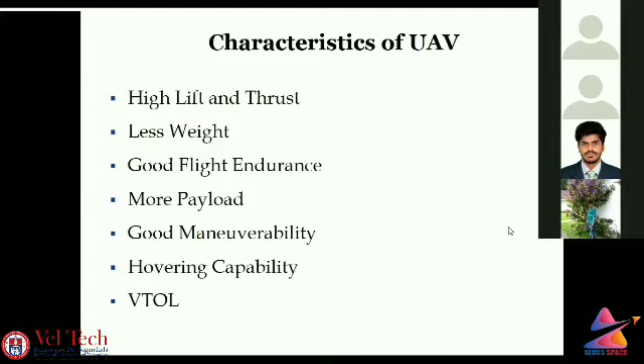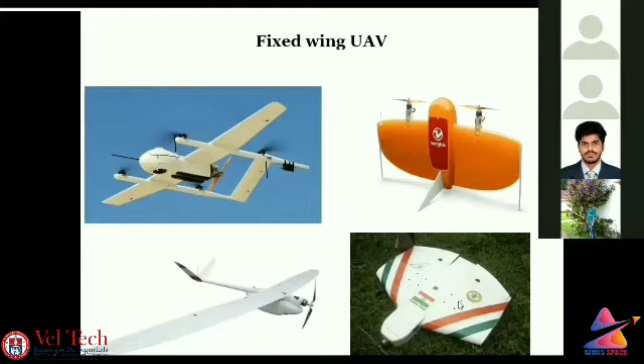So just a glimpse of a few vertical takeoff vehicles. This is one vertical takeoff vehicle, and this is also a vertical takeoff vehicle. And some of the other vehicles here were developed by our DRDO lab.

If you take any fixed wing vehicle, you will have 3 control surfaces. As I mentioned about roll, pitch, yaw motion, the roll is controlled by this aileron control surface, pitch is controlled by the elevator, and yaw is controlled by this rudder.

So whenever you are sitting on an aeroplane, the vehicle is rolling and pitching up and down, and yawing is left and right motion. Rolling is rotating the plane about this axis, pitching is up and down motion about this axis, and yawing is your left and right motion.

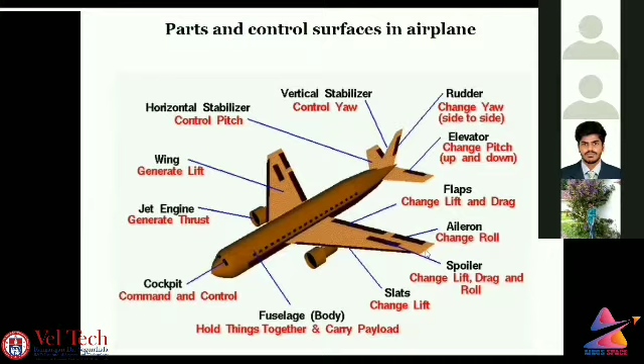So whenever you experience a flight, you have these 3 maneuverability controls to move and navigate in a space. That is what these control surfaces are useful for. Other elements like cockpits, engine, and additional stabilizers help ensure you are able to achieve a stable flight. So this is the basic control surfaces for a fixed wing vehicle.

If you think of lift and thrust, what is lift? Lift is nothing but a force generated against the weight, including the payload. So whenever you experience lift, it will be above this particular weight, including the payload.

Whenever these two are balanced, when the lift is balanced with respect to weight, and also the thrust, which is against the wind condition, the drag, when thrust and drag, and lift and weight, are equally balanced, at this condition you will be able to achieve a stable flight.

So the point here is you balance the vehicle, your unmanned vehicle, with respect to its own weight, including payload, with respect to lift, and you balance the air resistance, which is drag, external wind resistance, that is nullified with the help of thrust generated by the UAV. If you balance these two forces, lift and thrust, then you are able to achieve a stable flight in any kind of UAV.

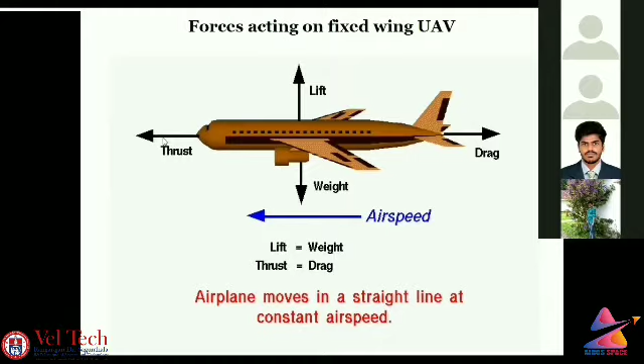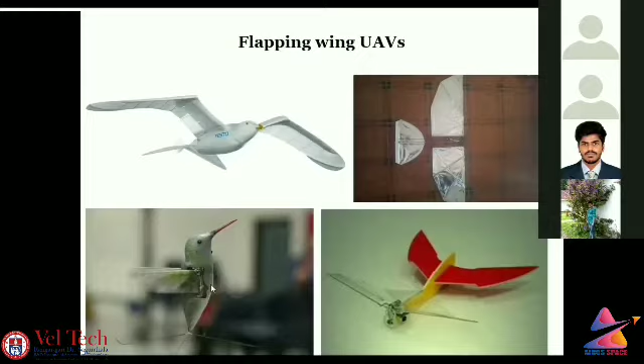These are all different flapping wing vehicles you can think of if you want to design any kind of bird-like structure. So what are the typical parts involved in the ornithopter?

Basically you will have a transmission element. You are having a BLDC motor, brushless DC motor, that will be rotating about 32,000 or 40,000 RPM. You want to achieve about 1,200 RPM, so 1,200 RPM divided by 60 will be 20 hertz. That 20 hertz flapping frequency requires you to reduce the speed from 32,000 RPM to 1,200 RPM.

So there will be a gear reduction unit in this, and also your rotary motion has to be converted into an up and down flapping motion. So the gears and the linkages are called transmission elements.

And we will be having a lithium polymer battery, an RC remote chip, also the controller unit, a small chip, and a flapping wing material like Parylene or Mylar or any other polymer-based material having high stiffness. So why high stiffness? It should withstand the high cyclic up and down motion coming from this particular mechanism. That is, the rotary motion is converted into flapping motion.

About 20 hertz means 20 cycles per second. So per second, it flaps up and down 20 times. If you think about a hummingbird, its flapping frequency is about 80 to 100 hertz. So it is flapping about 80 times up and down per second. So you should think of how much it should resist. Your wing material should resist the load coming onto it. So a flapping wing with high stiffness material is very much needed, otherwise it will tear off.

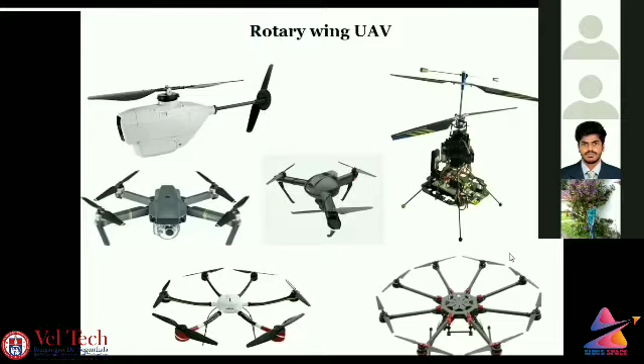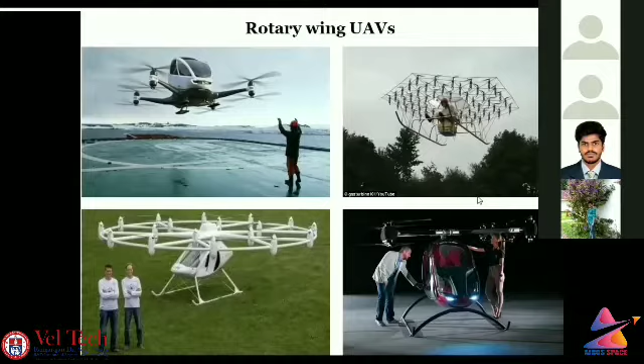So if you think of typical quad rotor parts, you will be having a brushless DC motor and propeller combination, and an ESC, electronic speed controller. These are coming together. Even the motor and electronic controller are integrated nowadays, so you don't have to waste the space. So this is the basic unit: electronic speed controller, motors and propellers. This is one set.

And you will be having the main brain of the system, called the flight controller, which I will explain in detail. And also you will have transmitters; the RC signal will be received by an antenna mounted on the UAV and the control receiver. And you will be having a battery; lithium polymer batteries are used for this kind of UAV because they are highly rechargeable and have good life. That is why we use lithium polymer batteries instead of other batteries. So these are the typical parts.

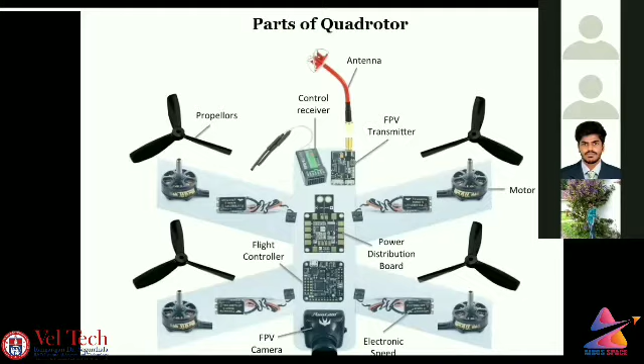If I go with specific parts, for example, if you want to select a propeller, normally propellers are both clockwise as well as counterclockwise. If you see this tip, you can see this box. Whenever air is hitting on it, it will rotate in a clockwise sense. You see a protrusion in the propeller, and the wind is hitting onto the propeller, and you can claim that rotation is clockwise. And here it is hitting in this direction, and this particular propeller is counterclockwise.

So why clockwise and counterclockwise propellers? With adjacent rotors rotating clockwise and counterclockwise, the two moments coming from each other will be balanced. So if I have a quad rotor, the adjacent two propellers should be opposite to each other, so that the moments will be balanced and we will achieve stability. That is why we go for clockwise and counterclockwise propellers. Generally, we define the propeller in terms of its diameter or length and its pitch. So 10-inch diameter and 4.5-inch pitch, for example.

So what is pitch? It is nothing but, when the propeller is rotating for one revolution, how much the UAV is advancing. So that is what the pitch is defined as. So if you are having more pitch, you will be moving very fast. So for example, if I want to select a propeller smaller in diameter with high pitch, it will be suited for fast and quick maneuvering operations.

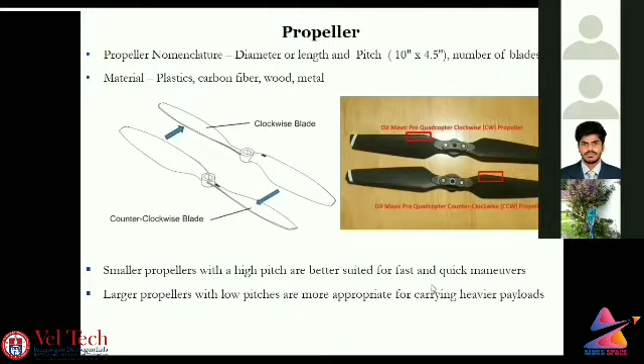So normally there are high kV ratings and low kV ratings. For example, if you want less load carrying capacity and your torque requirement is less, then you should go for a high kV rating. If your torque requirement is high, then you should go for a low kV rating. So high load means high torque, so you will go for a low kV rating. So depending upon the demand and your payload, you have to choose your kV rating.

For example, 180 kV will be useful for high torque requirement, high load requirement. 900 kV or 1000 kV when you want to move very fast but carry less load. So those aspects are important in selecting your motor. Nowadays T-Motors are predominantly used because of their high reliability.

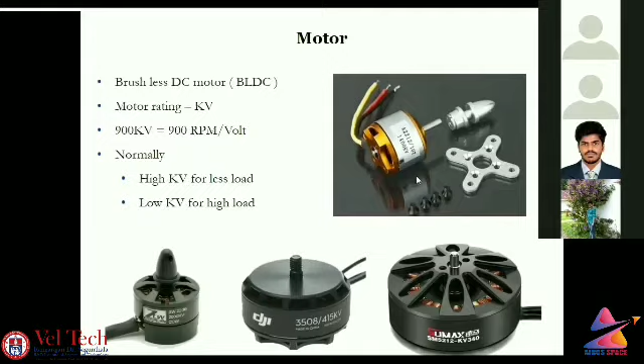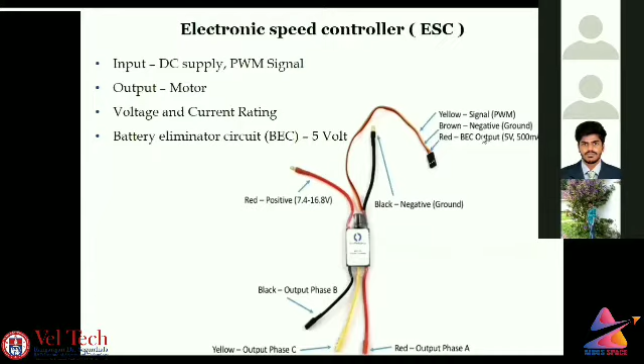Okay, and we have a transmitter. Usually the ISM bands, Industrial Scientific Medical bands, are using these 3-4 frequencies: 433 megahertz, 900 megahertz, 2.4 gigahertz, and 5.8 gigahertz for research purposes. So you have to choose any one of the frequencies for your RC, radio control. Normally 2.4 gigahertz is very widely used by all the people for radio transmission models.

And 433 will also be useful for telemetry signals. Whatever the sensors or control units, all that information from the UAV will be sent to the ground station with the help of telemetry, that is 433 megahertz frequency. You can use 900 megahertz for video and 5.8 gigahertz for some other purpose, or even 5.8 gigahertz for video and 900 megahertz for some other purpose. So it depends upon your application.

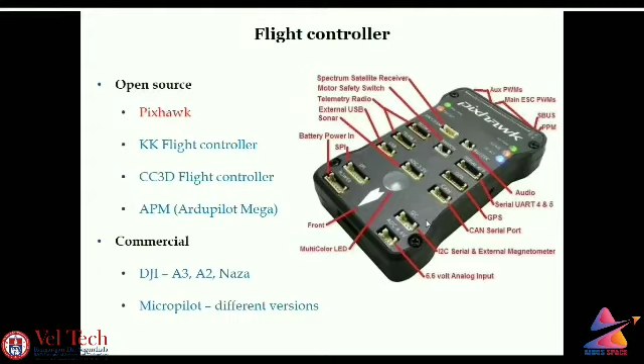And this controller will have 4 sensors. For example, the accelerometer will define your acceleration; then you integrate, and you will get the velocity of the vehicle. Gyroscope, which will give the angular velocity; then you can get the roll and pitch angles when you integrate this angular velocity. And magnetometer, which will give the direction of your vehicle. And barometer will be useful to understand the altitude with respect to its barometric pressure measurements. Your rho g h will be useful in calculating the height, altitude.

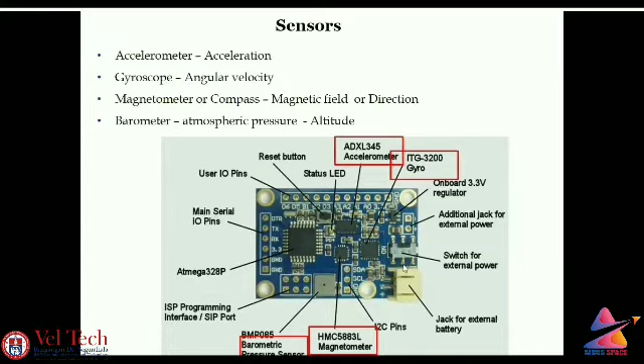So as you can see, all are micro-electromechanical based sensors. MEMS based sensors are nowadays very widely coming up. So you can play around with these kinds of sensors, get the feedback, and control your system. If you take any typical quadcopter, the circuit goes in this way.

You will be giving a 2.4 gigahertz radio control signal that will be received at the UAV by the control receiver, and that control receiver will send the commands. Whatever the commands from the 2.4 gigahertz frequency will be given to the corresponding units in the controller. The controller will send the signal to the ESC. That ESC will activate the motor.

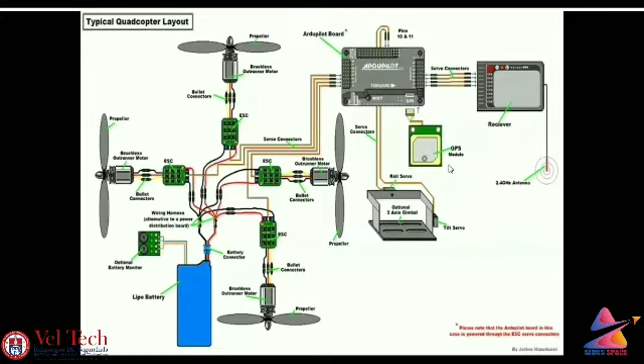So this is the typical flow of your UAV quadcopters, and you will have a battery to power all the electronic elements. And if you want to have some gimbals, you will have cameras to rotate. That is for your camera aspects. So you can have the gimbal system, and these are all the typical parts and how it is connected in terms of achieving the quadcopter UAV flying.

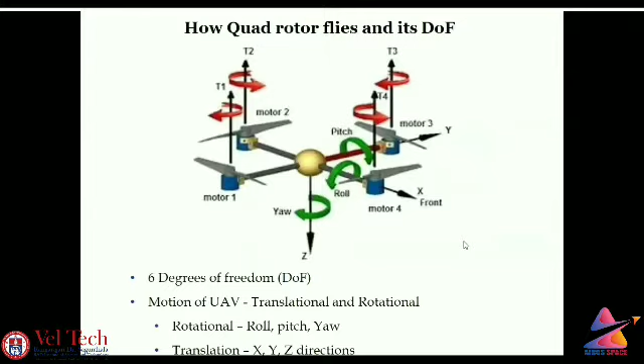So how does it fly? For example, normally it will have 4 rotors. So these are the 4 different conditions. For example, if I want to move the UAV, the quadcopter, I'll increase the speed uniformly for all rotors. So with respect to the thrust generated by the propeller, each propeller at the same speed will generate an equal amount of thrust. Then it will move up, against the weight including the payload. So we will be achieving the throttle condition.

And hovering: when all the motors are rotating at constant speed, we are able to achieve hovering. Pitch: the rear motors and front motors are controlled. So if you want to move forward, we will rotate this one at high speed and this one at low speed, and backward is the inverse. And if you want to roll with respect to this axis, we'll rotate this faster and this slower. And for yaw motion, the diagonal propellers will be rotated fast, and the other diagonal propellers will be rotated slow.

So this is the basic input and basic motions, how roll, pitch, yaw motion and hovering are achieved when you activate these four motors, varying the speed of the propellers and motors. So normally a PID controller, proportional, integral and derivative controller, is used in the Pixhawk or other basic controllers. So proportional will give how much you are able to move towards the destination. That is with respect to this gain, and the error is calculated from the feedback from the sensors.

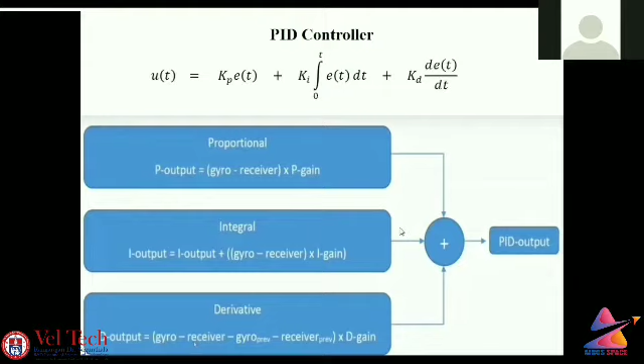So we have a ground control station to predefine the trajectory for flying in autonomous mode. What is autonomous mode? We don't have anyone to control your UAV. We just define the trajectory with respect to waypoints, what altitude and what speed, whether you want hovering at any particular point, and what latitude or longitude it is moving to. All that information will be stored and predefined. So you will just be flying in autonomous mode. So the ground control station is useful for that purpose.

Whenever you want to design any UAV, you should follow a certain procedure. For example, first you should calculate the weight. What is the weight of the system, including the payload? So based on that weight, you have a definition called thrust to weight ratio. Your thrust should be at least 2 times the weight, that is thrust to weight ratio 2. And what kind of endurance you want to go for. So this is the input you are looking for.

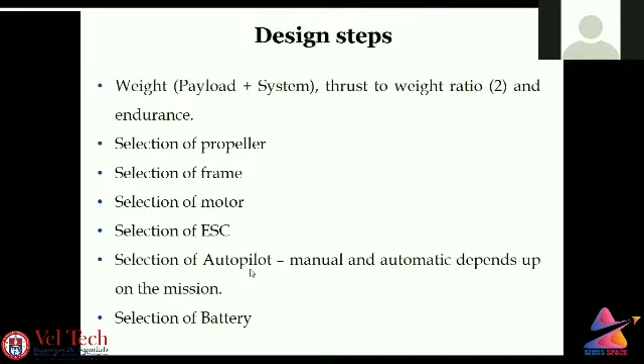According to this thrust, you will select the propeller, motor and ESC combination, and the frame, because depending on what payload you want to mount, you will design your own frame. And also your autopilot system, manual or automatic, depends upon the mission, manual or autonomous mode with predefined waypoints. And finally, with respect to your endurance, you select a battery, as I mentioned, the lithium polymer battery. So these are the different steps when you are designing a UAV.

We have done some work designing UAVs. First and foremost, we place the components to balance the CG. We go for initial CAD modeling, so that you have an idea where and how to place the components so that your center of gravity is balanced. That is the first thing you should take care of, because if your CG is out, everything is gone. For example, these red ones are the 4 batteries we have positioned, and in other places we have positioned other components, so you have a balanced CG.

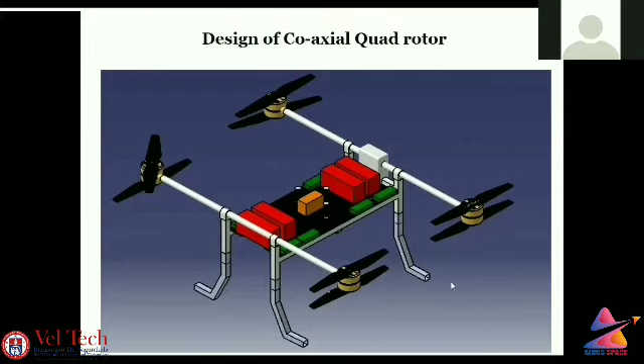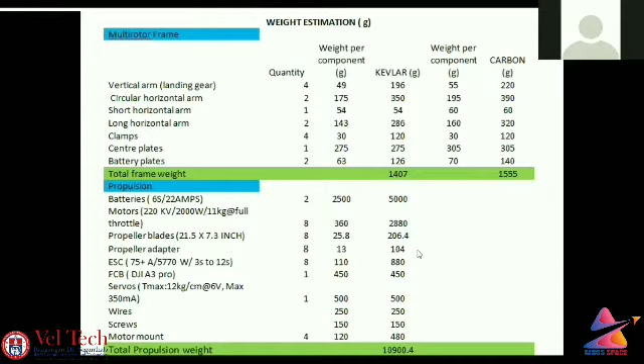And this is the simple autonomous flight we had at our Vel Tech. So this is our research park. I mean, this is our ground. This is our research park where I am sitting. So this is the trajectory which we planned. So this is the input and output, whether it is matched. So it was estimated and set point. Both are almost in a similar track.

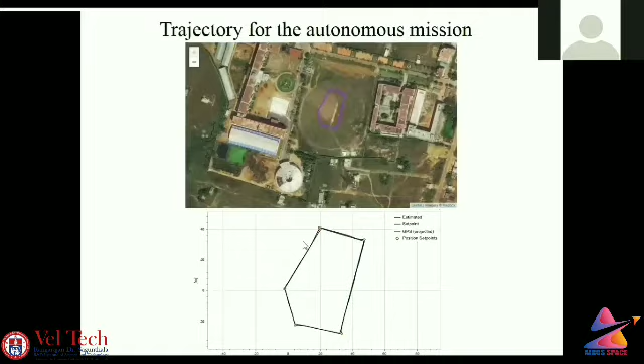So this is how the fundamentals of UAVs show the outline, what kind of components and how to select those components with respect to multi-rotor. Generally speaking, we should use UAVs where humans have difficulties, where we are unable to climb and do some of the works like bridges, heritage structures, and monuments, and some of the places where human risk is involved. So those aspects we were targeting using our applications.

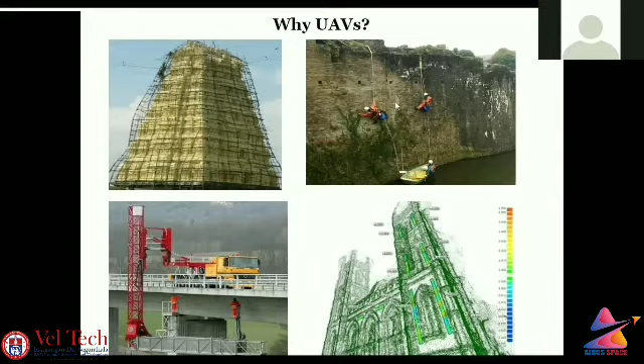So we have been working for the past 10 years, and these are some of the applications like power line inspection, telecom tower inspection, environmental monitoring, mines, pesticide spraying, water sampling, remote water bodies, bridges and heritage structure inspection, air quality measurement, traffic monitoring, and disaster missions. So these are all the different applications which we have already forecasted and some of the projects we have already completed.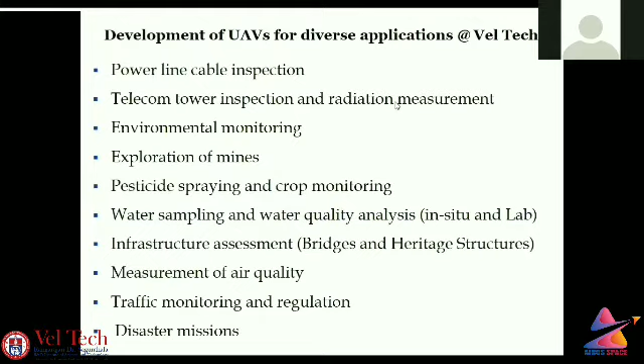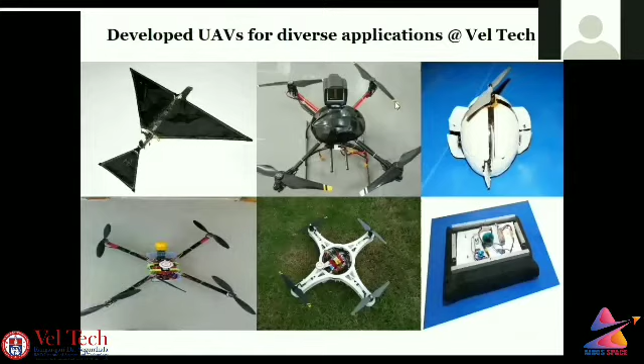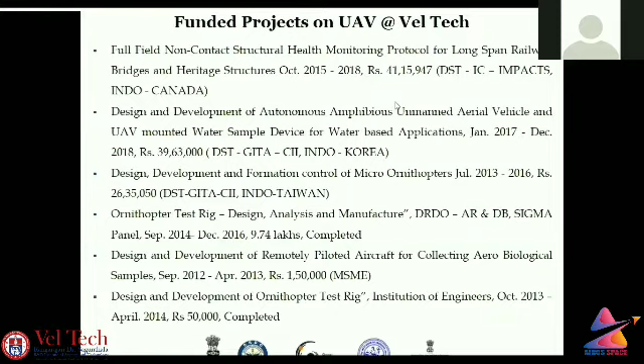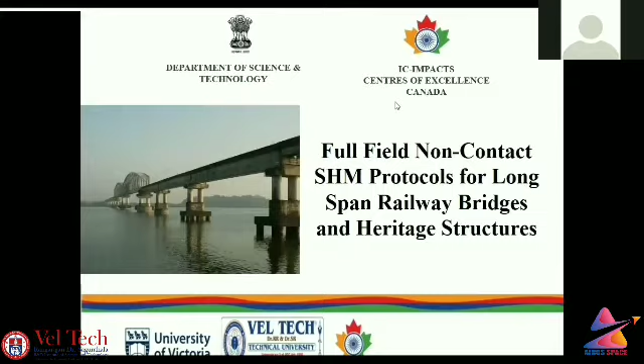And these are some of the UAVs which our students and various funded projects have developed with our Vel Tech. Some of the funded projects like DST, Indo-Canada, Indo-Korea I will discuss, and one more project between India and Taiwan, and DRDO, and student level projects like MSME and IEI. So the first project I want to show today is Indo-Canada between Vel Tech and the University of Victoria. It is about the inspection of long span railway bridges.

The idea is you have a UAV with multiple sensors, including thermal cameras, HD cameras, ultrasonic sensors, or moisture measurement meters, all non-destructive sensors which will be mounted on the UAV. If it is a sensor, it will be transmitted as sensor data. If you have an image, HD or thermal, it will be transmitted as an image to the ground, to MATLAB. For example, you can process the sensor data through LabVIEW, and you can do all the processing at the ground control station.

Then we can develop a structural health monitoring protocol. What is the quality and what is the life of the structure with respect to sensor data or image data. Then that information can be stored in a database that can be given to Indian Railways or the Transport Department, whoever is concerned. So this was the idea, and we have executed it. Basically, we have used image processing and fuzzy logic. Together, we are able to use these two to identify the defects as well as the structural health condition. That is the objective.

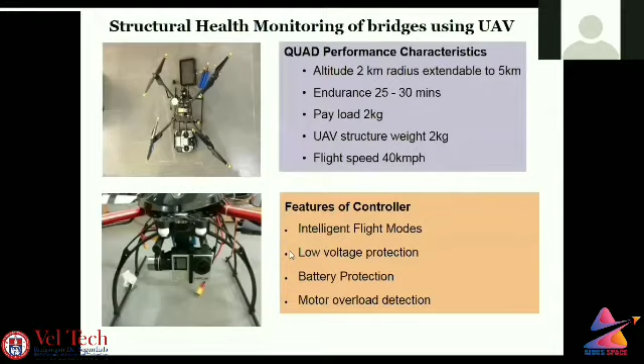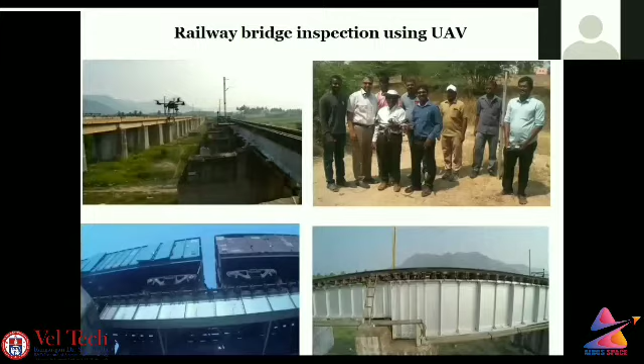That was the objective. This UAV has about 25 to 30 minutes endurance, a payload of about 2 kg, and the flight antenna range is about 2 km, but it can be extended up to 5 km. We have used a GoPro Hero 4 HD camera for collecting data, and also a thermal camera. We have inspected some of the bridges at Chittoor, Vellore, Arakonam, Renigunta, and this is our team. He is Dr. Rishi, and other people from Southern Railways.

We have developed a graphical user interface for corrosion, sulfate attack, acid attack, and other problems associated with bridges, based on guidelines that specify what kind of defects and damages to look for. Based on that, we developed a protocol.

Through image processing, we identify and quantify those defects. Then through fuzzy logic, we combine all those defects and evaluate the bridge condition on a scale out of 5. This one is 3.97, meaning it is heavily damaged.

This is the idea of image processing and fuzzy logic together - we are able to quantify the bridge damage.

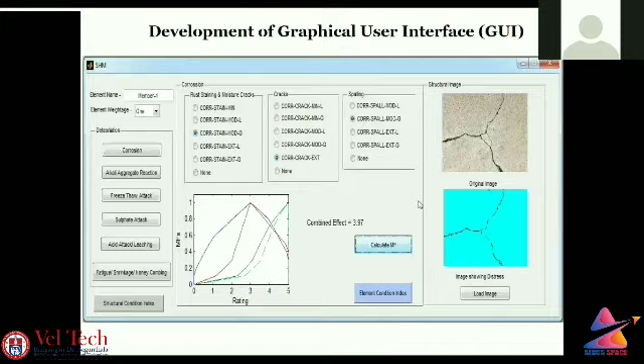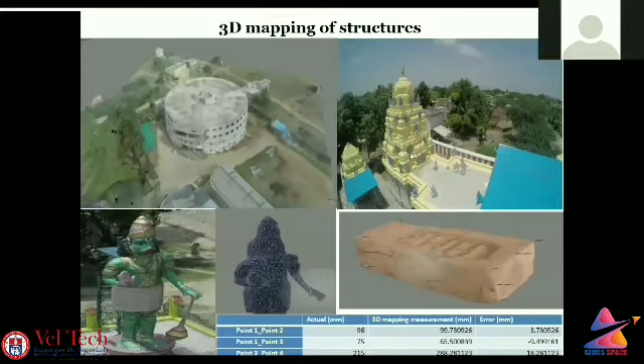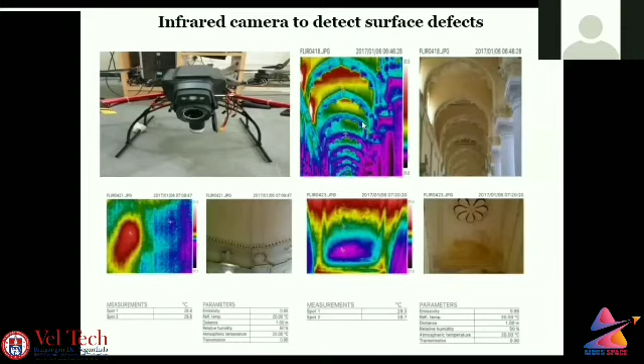We went to the Tirumala Nayaka Mahal at Madurai, where we used thermal cameras. You can see this particular moisture ingress - in the normal image you cannot see it, but in the thermal image you can see the moisture ingress, which leads to corrosion. So this is the use of thermal images.

And UAVs - we also went to a palace called Lakshmi Vilas at Vadodara. We 3D mapped the complete structure and then 3D printed it. This particular palace was 3D printed after mapping, using an FDM 3D printer, and then we painted it.

So this is our objective for the Indo-Canada project on bridge inspection - we used UAVs and heritage structure 3D mapping to understand the structure condition. That is our target from the Indo-Canada project.

The second project is Indo-Korea, where our Vel Tech Institute and UCAL, a company, are involved. Mr. Vasantraj was initially involved in this. DGIST is an institute in Korea, and ROVITEK is a company working on autopilot systems. This is an industry-institute collaboration, and the aim is to design and develop an amphibious vehicle.

What do we mean by amphibious? It has a multi-rotor system and a hovercraft. Combining these two systems, this amphibious vehicle will fly, land on the water, move along the water, and collect water samples. Some onboard sensors will touch the water surface and transmit the data through IoT.

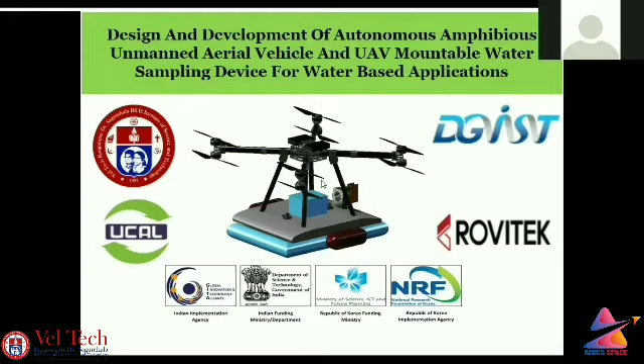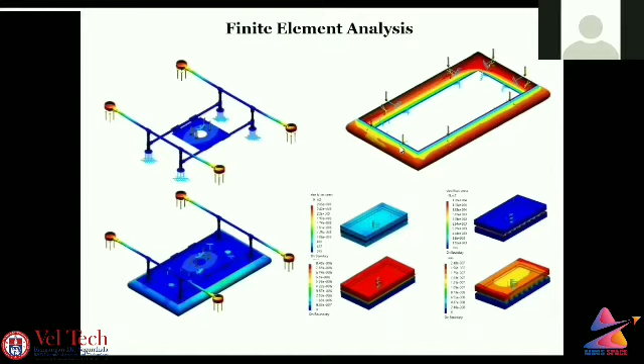That was a project we developed. Initially, we examined the structure through many iterations of conceptual evaluation models, and then understood the flow characteristics and rotor-to-rotor interaction - whether this vehicle would be stable in different wind conditions. We did CFD analysis for pressure and velocity distribution to ensure stability during wind conditions.

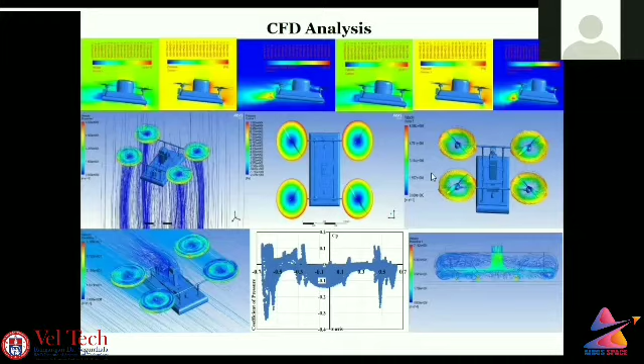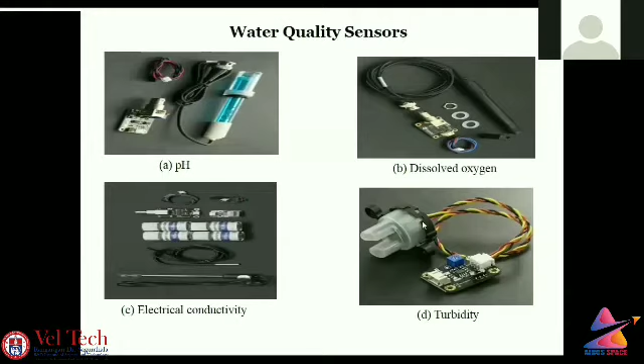We used around 4-5 sensors: pH, dissolved oxygen (DO), electrical conductivity (EC), turbidity, chlorophyll, and others, which were mounted on the structure. So this is the final amphibious structure.

You can see this is a multi-rotor system with coaxial rotors - I already showed the approximate design - and this is the hovercraft system for collection of water. Beneath this, there will be a pump and motor to suck the water, which is then stored into water bottles.

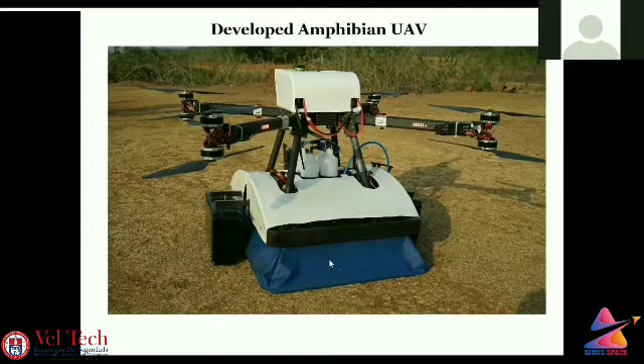We also have sensors underneath - the 4-5 sensors I mentioned - that will just touch the water as it lands. Once it lands, it goes into hovercraft mode and moves along the water, collecting water samples at each location along with sensor data.

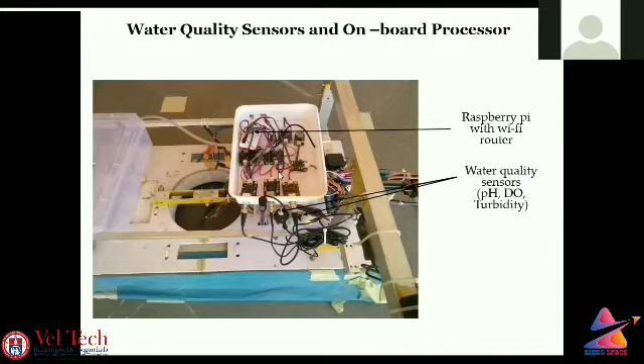These sensors are connected to a Raspberry Pi and Wi-Fi router. As they touch the water, data is processed through the Raspberry Pi and Wi-Fi router and sent via an IoT platform. We compared 4G, 3G, and 2G networks, and 4G's performance is best. We also measured power consumption for all units and the time taken to sense and retrieve data from all the sensors.

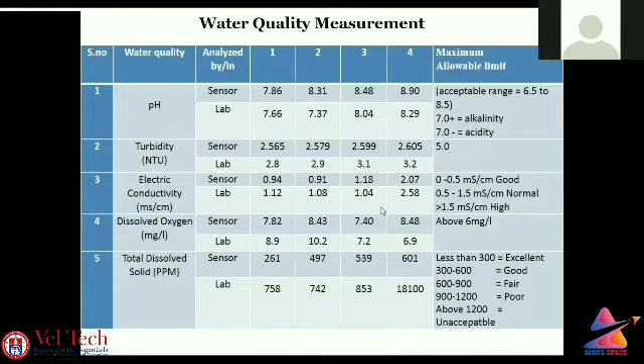So we collected the in-situ sensor data and the water sample for laboratory analysis. It is almost matching, so we are able to confirm that our measurement from the sensor and the lab data is almost equal. So we can use this vehicle with this sensor for any remote water body location measurement, water quality measurement. This is about the Indo-Korea project.

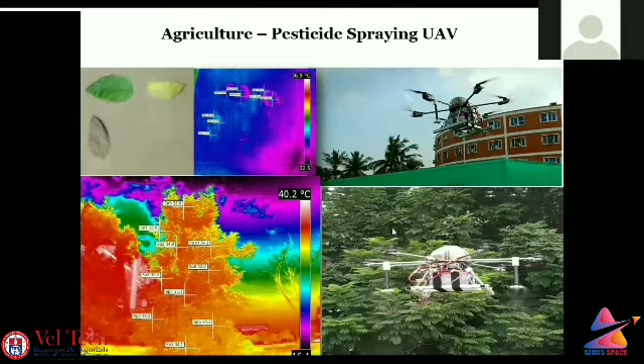Now we are focusing on the agricultural side. This is basic, it was developed in 2015. We started with pesticide spraying. Now we are moving with respect to DBT, Department of Biotechnology. We are working on some projects monitoring groundnut images, seaweeds, and so forth. We will be working on some other projects with respect to agricultural aspects. I'm not disclosing anything now.

And mining, we went to Dhanbad. We have inspected a mine. This is 3D stitched - after collecting the images, we stitched those images together.

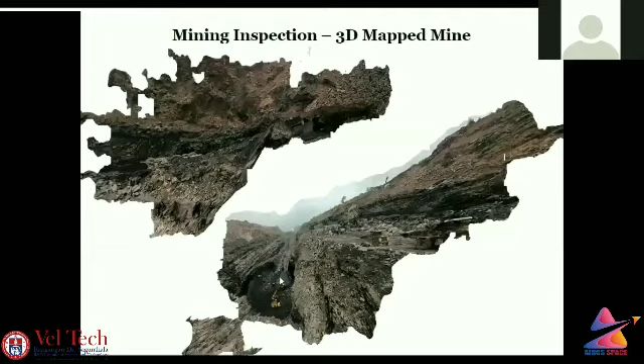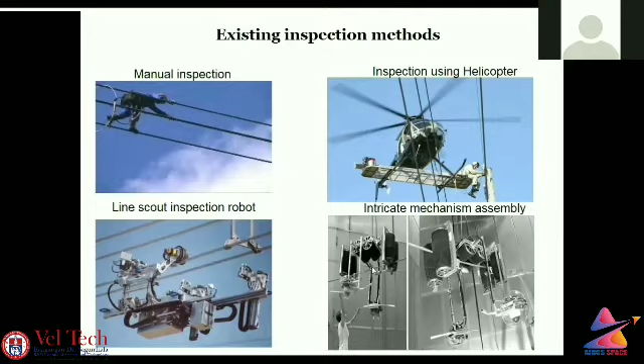And at the student level competition, there was a competition for power grid to inspect the power line cable. Existing approaches like manual helicopter or some complex mechanisms were difficult, so why not use these kinds of hexarotors. Mr. Vasantraj and myself were involved in developing this hexarotor with around 5-6 students.

The hexarotor will have a high payload capacity because of the many carrying units. This particular vehicle's structure is just about 2.5 kg total weight. We won this competition between IIT Kanpur and Vel Tech, sharing first prize of about 5 lakhs. We also applied for the patent - it will come soon, it's in the final stage.

The next one was how to inspect telecom structures and what kind of radiation was coming out from them. There was an award called Aegis Graham Bell Award in 2015. This particular electrosmog meter measures the radiation intensity. We flew this UAV towards the telecom structure and measured the radiation intensity.

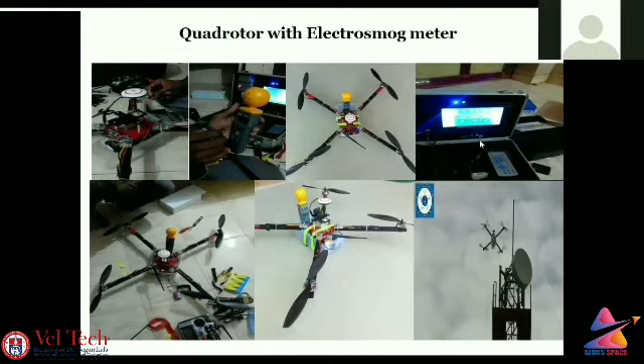You can see this screen, focusing a small camera onto the display, showing the ground control system. It was a very preliminary prototype model, and you can measure the radiation at different altitude and different latitude, longitude position, so that we can understand the radiation pattern.

This electronics people can do, and this team was involved - we won this Aegis Graham Bell Award in 2014. There were so many competitors like Airtel, Aircel, Idea, so much competition. We went in this category of innovative business model, and also in a worldwide competition, the same idea was appreciated.

This is another picture from NASA. Each box - blue, red, green, pink, and brown - concentrates on characteristics I mentioned earlier, like lift to drag ratio, propulsion characteristics, minimal weight including empty weight and reducing airframe structure weight, optimization, FEA, propulsion and endurance aspects, specific fuel consumption, and autonomous mission aspects.

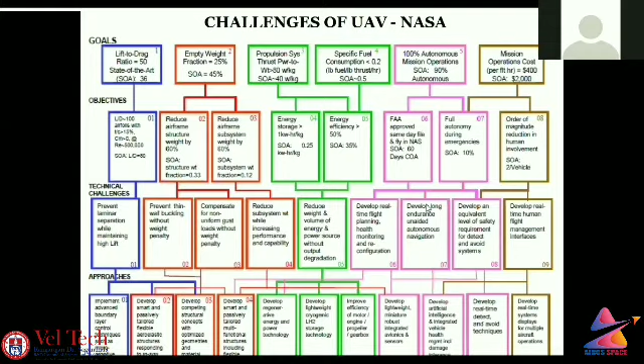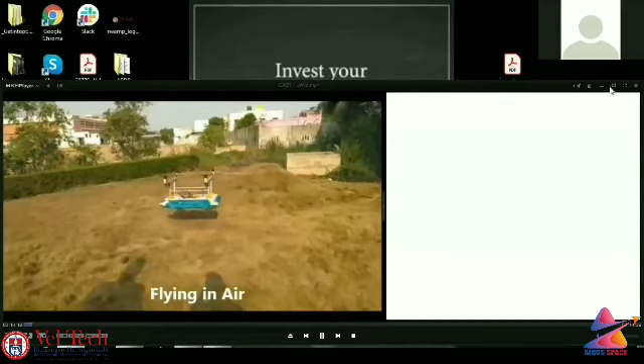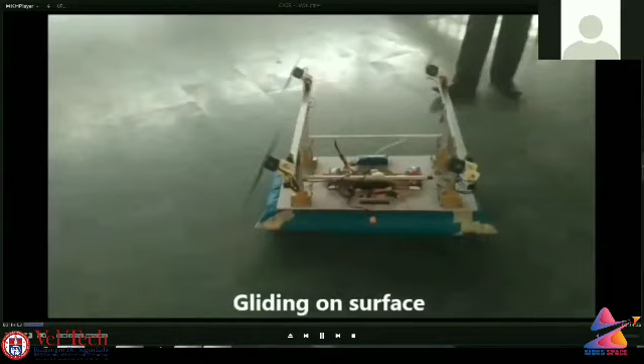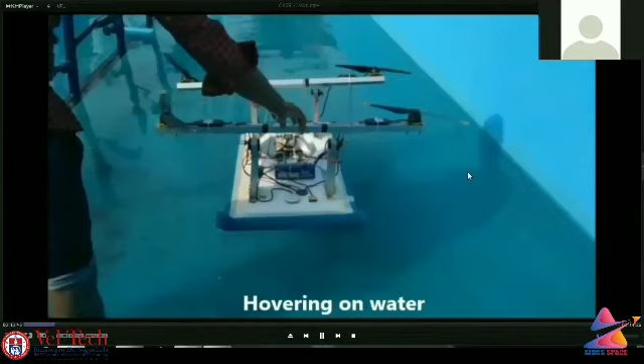So whatever I mentioned about Indo-Korea, this amphibious vehicle, first level prototype, basic test on flying in the air and moving on the surface. So what we have done is we have just rotated this, that's all, we have not used anything else. We just rotate the propeller with a small servo motor so that it will move forward. So that was the idea, that will save the motor and propeller. So this is on the water.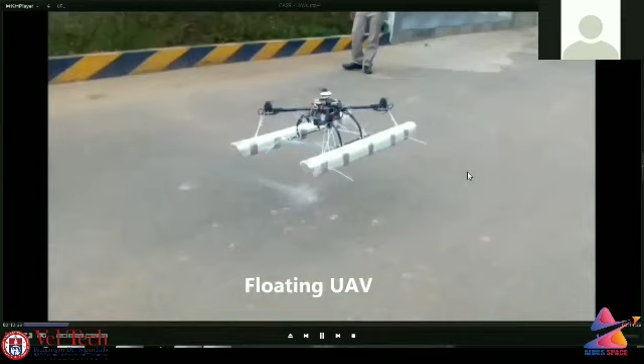And the second category we are working on a float type. That was previously on the hovercraft type, skirt type, that's what's hovercraft. This one is float, just it will go on land and it will float. It will not move.

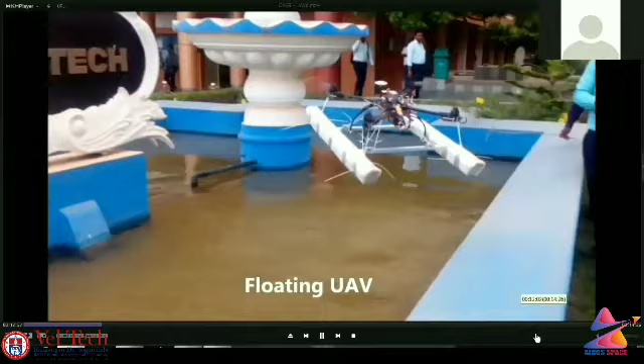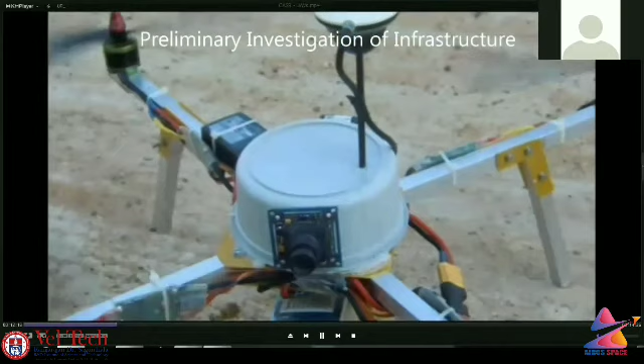This is the first level test we did with small camera for image processing aspects. So the images will be processed online in MATLAB environment. Whatever image source, the online processed image, whenever there is data coming from the UAV, it will be processed in the ground control station using MATLAB.

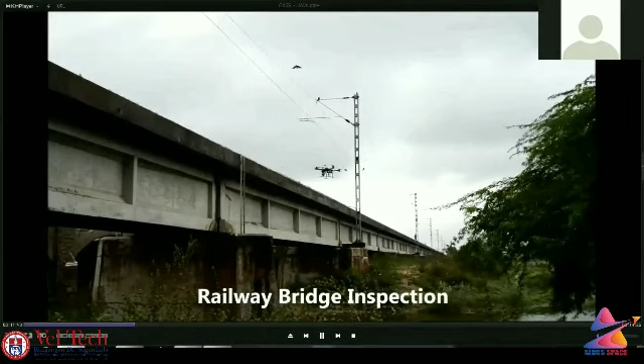So that was the first step we did. Based on that, we got this particular Indo-Canada project. So this is the real railway bridge inspection. We have collected those images, but we have not processed on board because it was heavy data, HD data is very heavy. But it will be possible when we go for higher end processor and units.

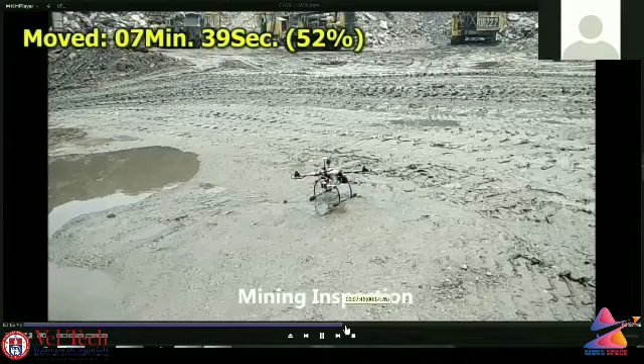And during inspection, we went to Dhanbad. So I already shown just image stitching. This is the image onboard camera.

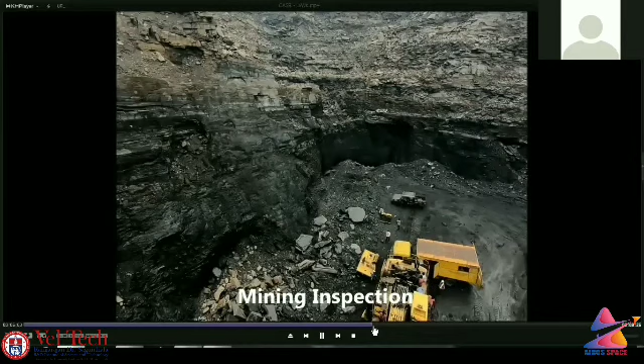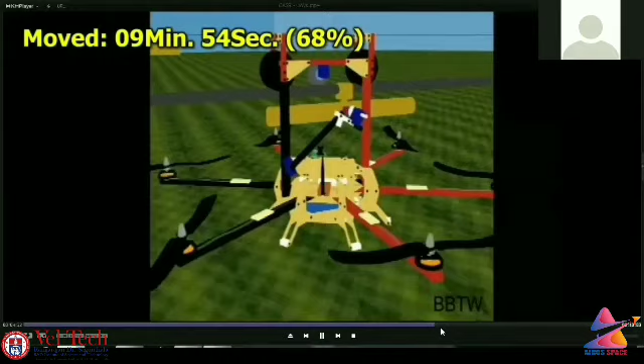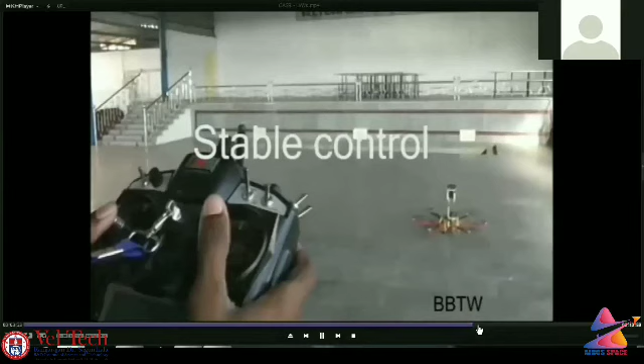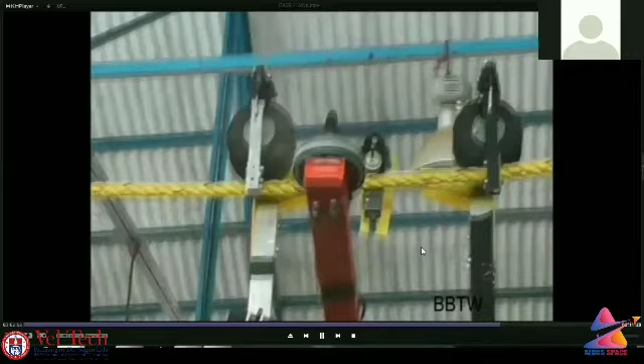And also onboard camera will be there, for example this is the power line cable, you want to monitor this cable remotely. So there will be a camera here, this camera will just focus this cable. If there is any thermal or any breakage, you can see this maybe with the help of thermal camera, that can be monitored remotely. So that was an idea of the power line inspection.

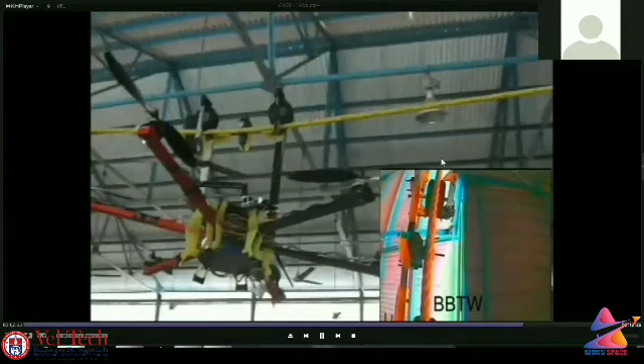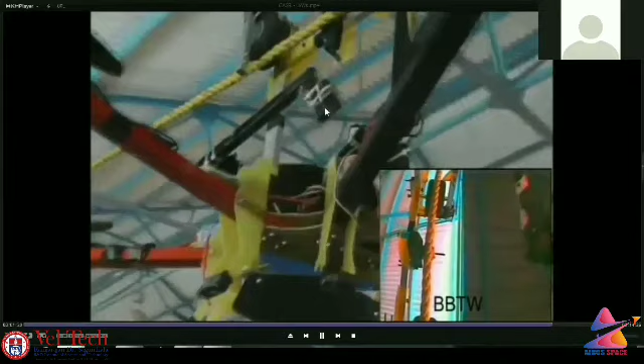So this particular video is coming from onboard to ground control station. So there is a small robotic arm kind of structure, so it can move up and down. If can attach some small torque wrench, there is a bolt loosen, then that will be tightened with the help of torque wrench.